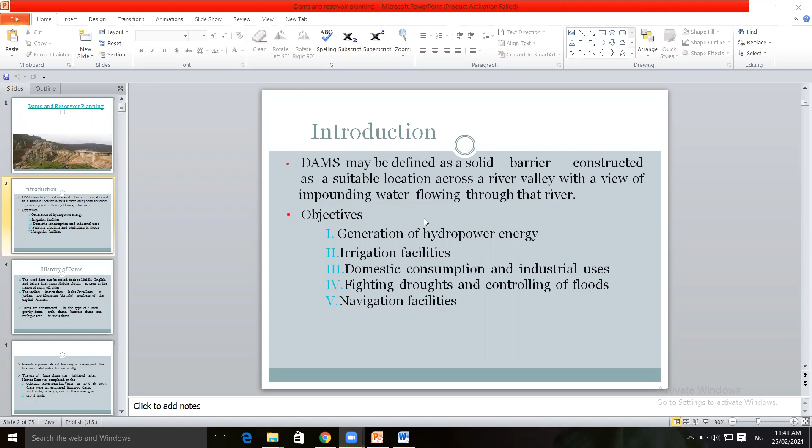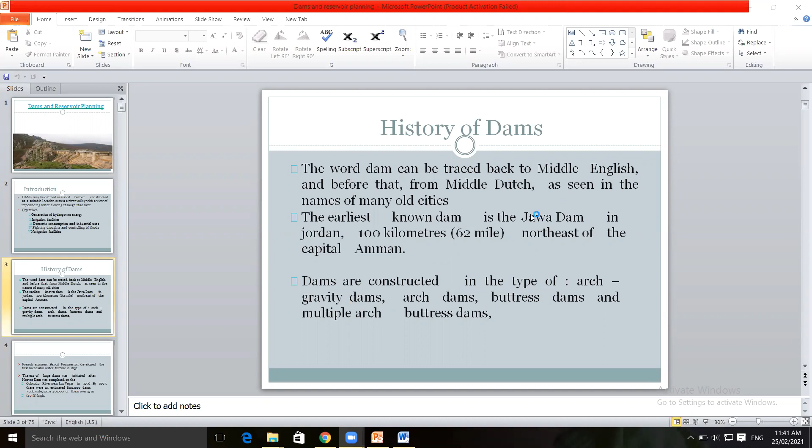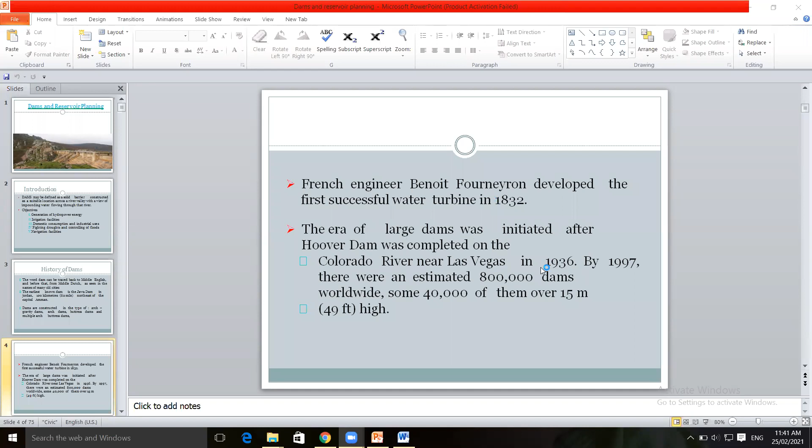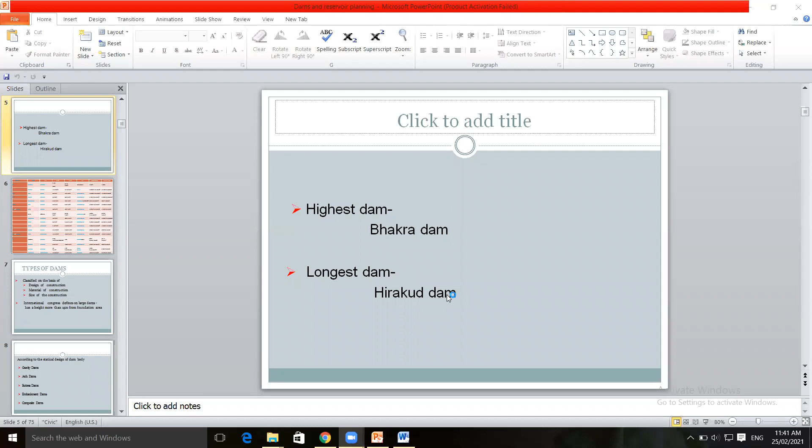The highest dam in India is Bhakra Dam, Bhakra Nangal Dam, and the longest dam is Hirakud Dam. In the table we have seen the longest dam in India and the highest dam in India.

The longest dam is Rihand Dam, constructed across the Rihand River in the state of Uttar Pradesh. It is a concrete gravity dam, having storage capacity of 10.6 cubic km.

Below that, Koyna Dam is there, constructed across the Koyna River, having length 807.2 meters. This is a gravity dam. This Koyna Dam is in Maharashtra state.

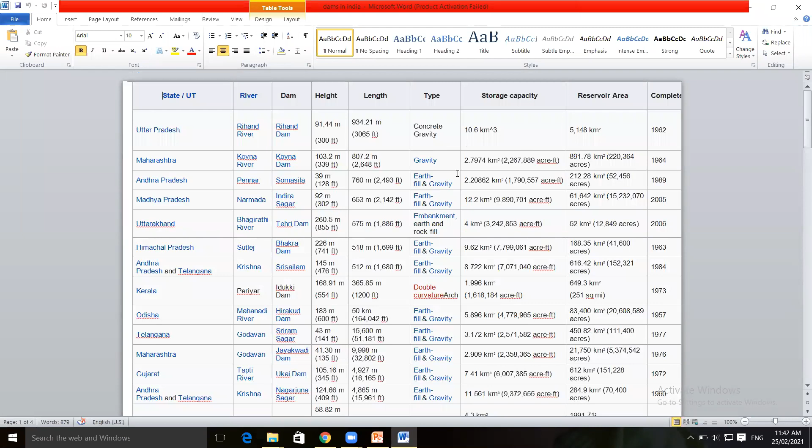So there are different dams according to type and material used, like earthfill and gravity dam, and double curvature arch dam.

So the highest dam is Tehri Dam, having height 260.5 meters, constructed across the Bhagirathi River in Uttarakhand state, having storage capacity 4 cubic km.

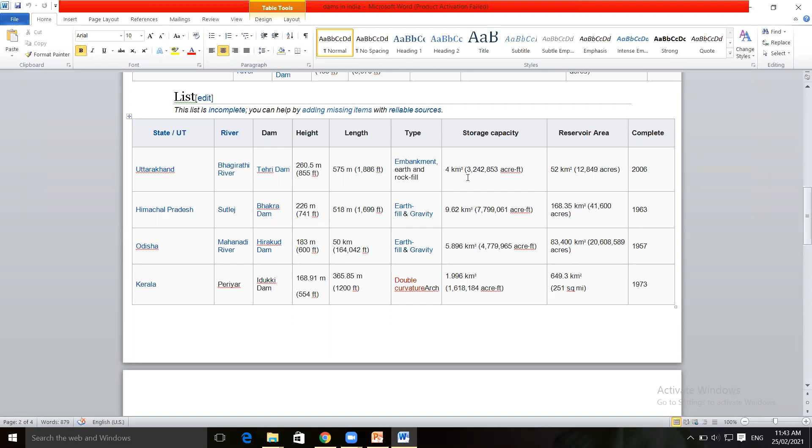So this table shows the different types of dams according to their length, height, storage capacity, reservoir area, and completion year.

Then we have seen the type of dam according to the design of construction. The dams are classified as gravity dam, arch dam, buttress dams, embankment dams, and composite dams.

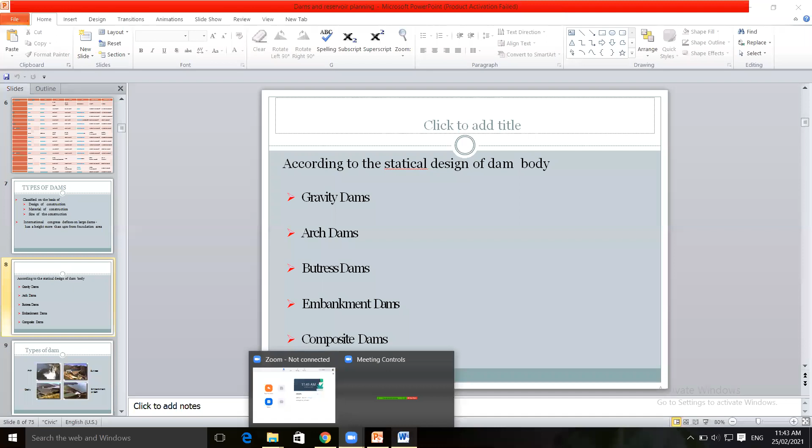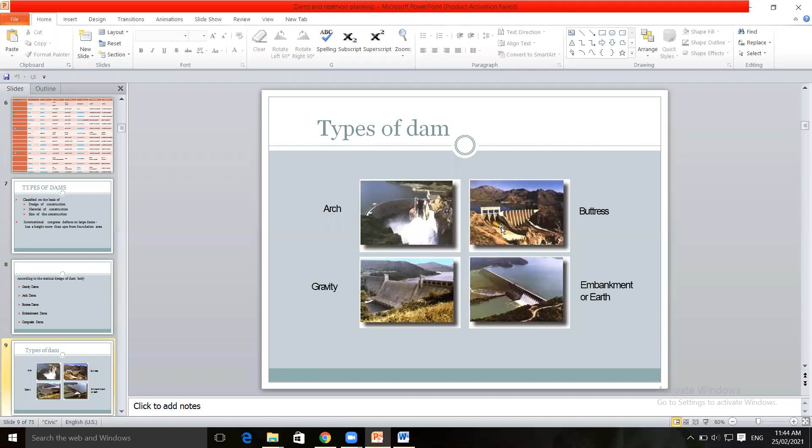These are various images of different types of dams: gravity dam, embankment or earth dam, buttress dam, and arch type dam. These are the various images according to the design of the dam structure.

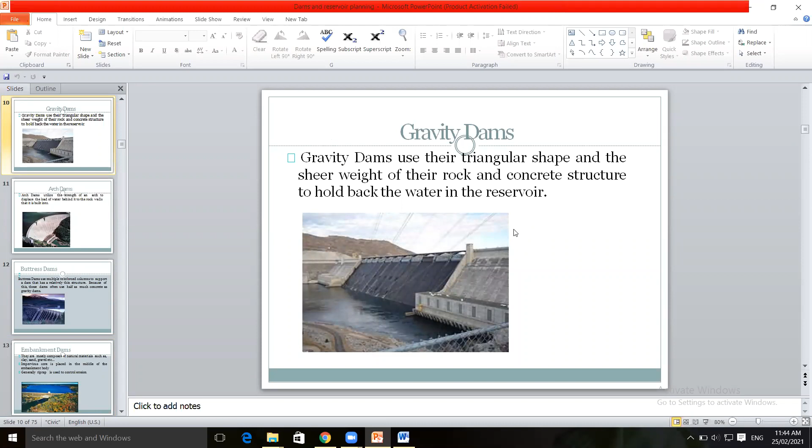This is a gravity dam. It is triangular in shape, and with its own weight it will obstruct the water. Arch dam utilizes the strength of the arch to displace the load of the water on the upstream side. The arch shape is an arch type dam. Therefore, the name given to this dam is arch dam.

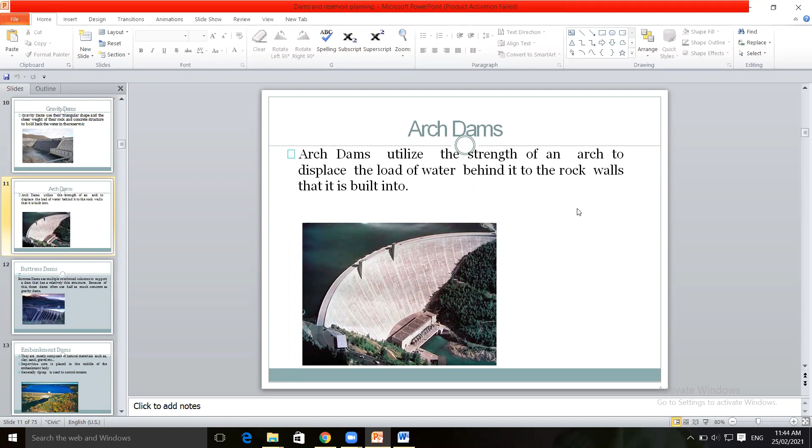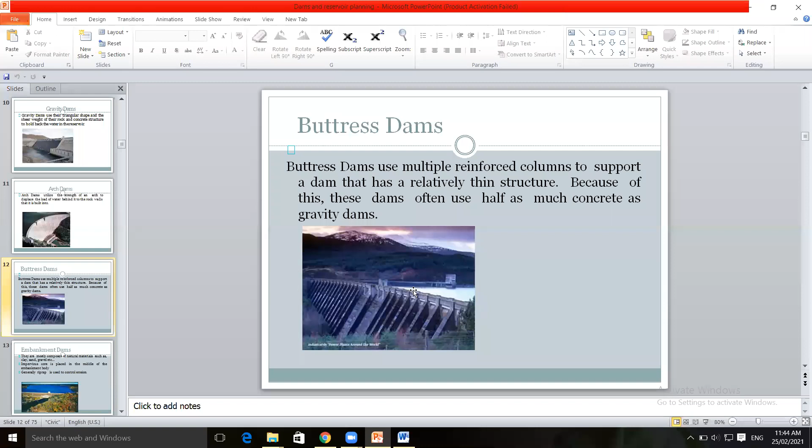Then buttress dam: in this, reinforced columns are supported on the downstream face to maintain the verticality of the dam or to obstruct the water. The buttresses are provided. Therefore, the name given to this dam is buttress dam.

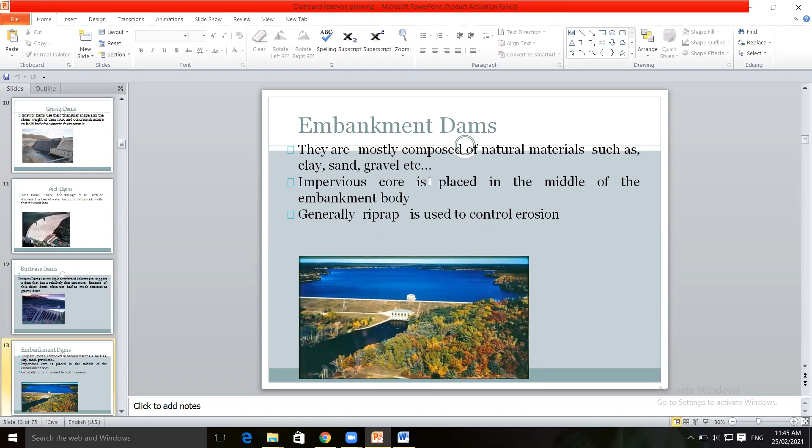An embankment dam is mostly composed of natural materials like clay, sand, gravel, and aggregates. Therefore, the name given to this dam is embankment dam or earthen dam, which is mainly consisted of earth or soil.

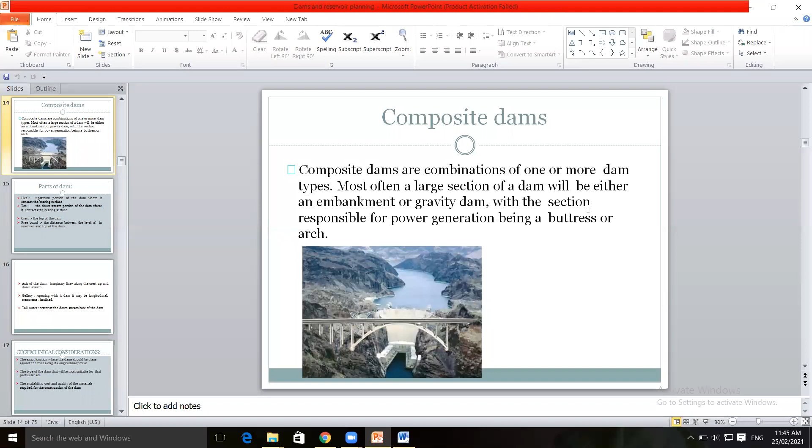And composite dam, in which a combination of dams is used depending upon the objective and function of the dam construction, these composite dams are constructed. There may be a combination of embankment or gravity dam, or a combination of buttress or arch dam.

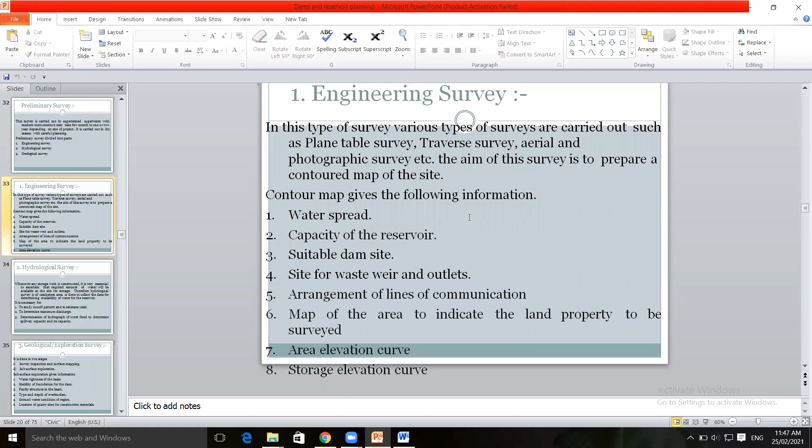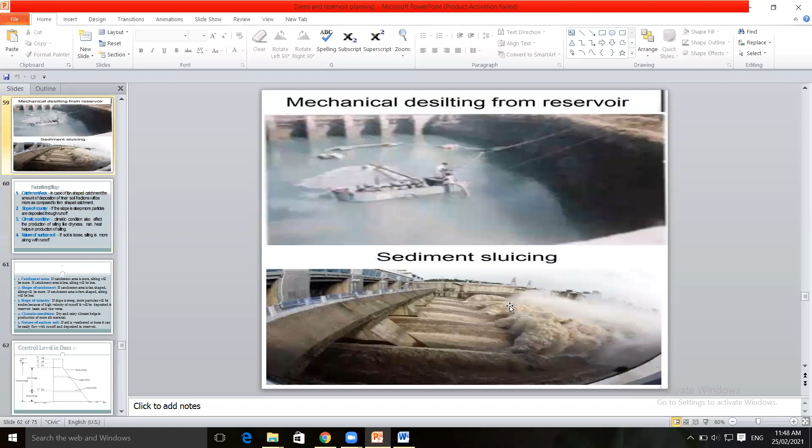Then crest. Crest is the top of the dam. The top of the dam is called top bund level, also called crest level - that is the crest of the dam.

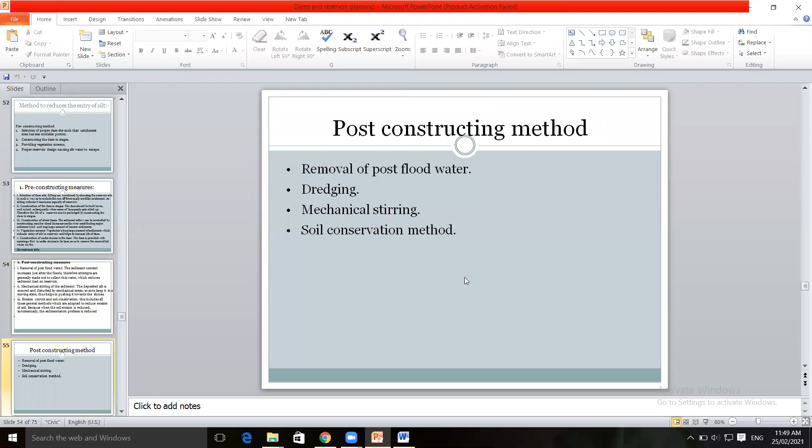Then freeboard - the distance between the top bund level and the highest flood level. The top crest level of the dam up to the highest flood level: the distance between this is freeboard, TBL and HFL, the freeboard.

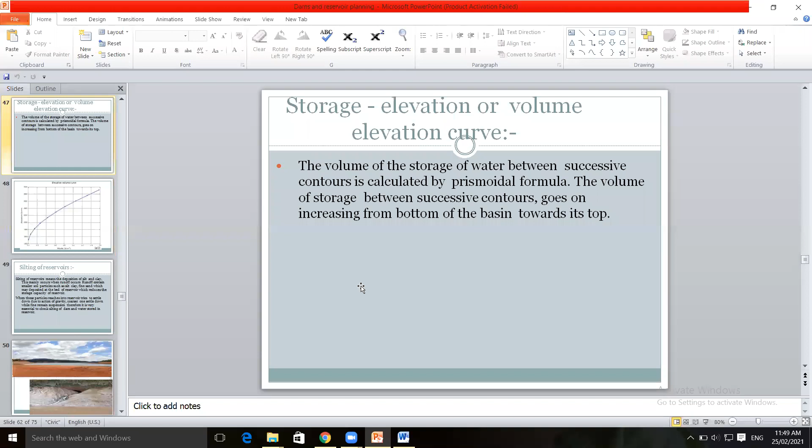Then axis of dam. Axis of dam is the imaginary line along the crest, up and downstream end of the dam, passing through the crest at the upstream and downstream end. That is the axis of the dam, which is along the crest level, along the length of the dam.

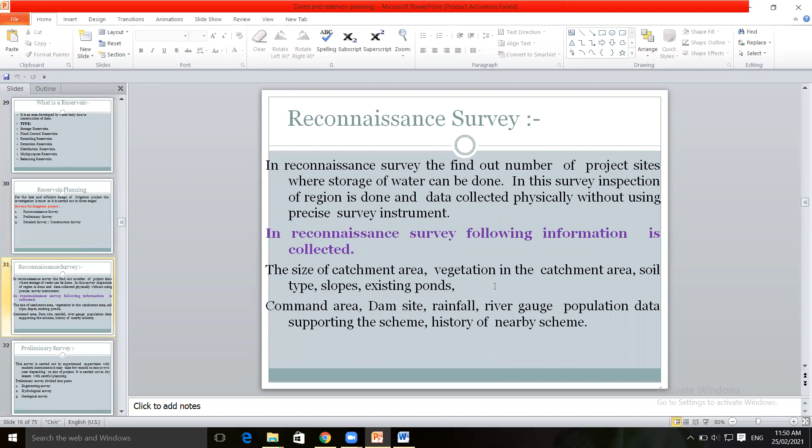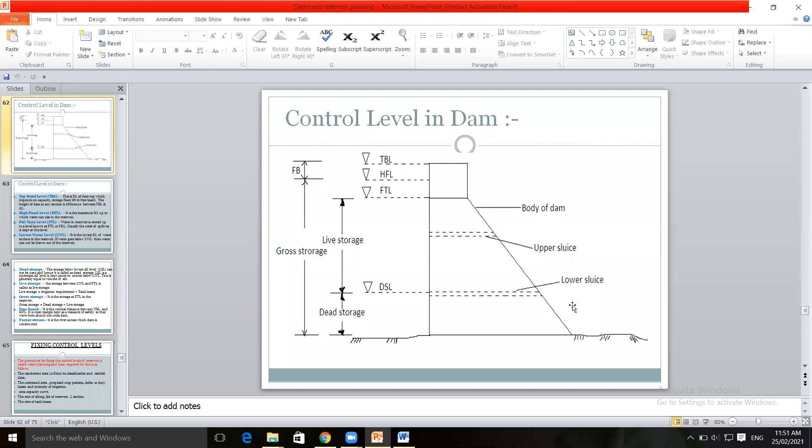Tailwater means the water at the downstream base of the dam, downstream side, downstream area - the water which is stored there is called tailwater. And water which is stored on the upstream side, that is the storage reservoir.

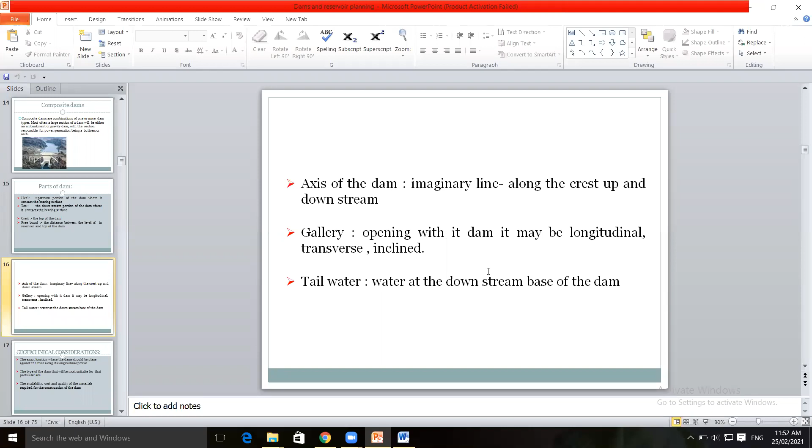So the parts of the dam are: heel, toe, crest, freeboard, axis of the dam, gallery, and tailwater. Heel is on the upstream portion of the dam at the bottom, and toe is on the downstream portion at the bottom, at the downstream end. Crest is at the top of the dam at top bund level. Freeboard is the distance between the top bund level and highest flood level. Axis of the dam is the imagined line along the crest, upstream and downstream. Galleries are the openings provided in the dam, which may be in longitudinal direction, transverse direction, or inclined. Tailwater is the water stored at the downstream base of the dam. These are the parts of the dam.

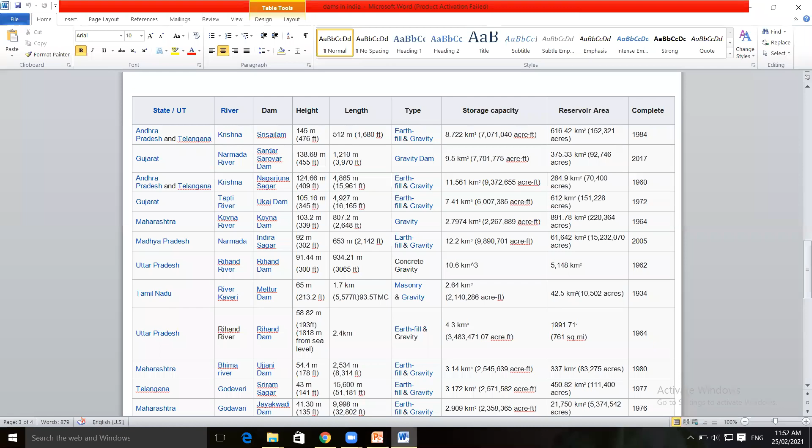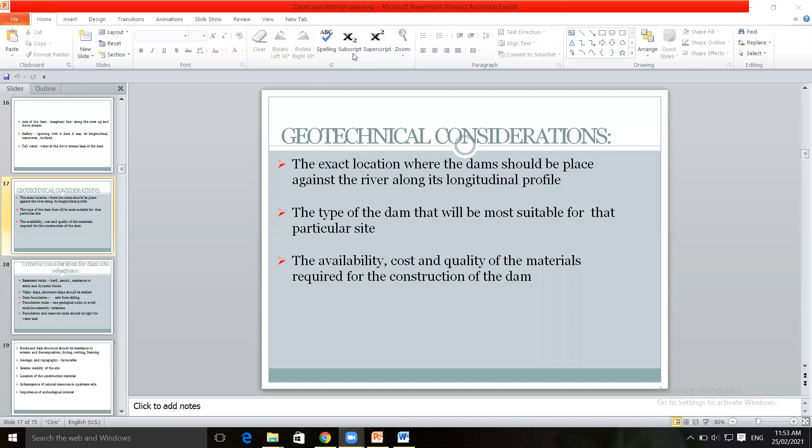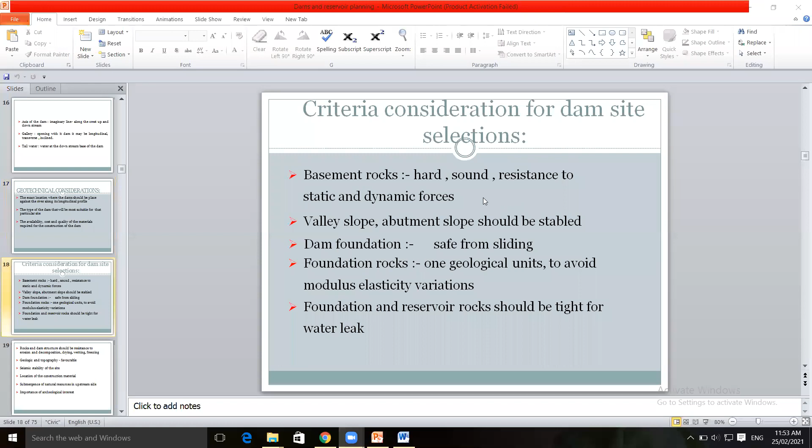In the next section, we'll see the various consideration criteria for selection of the dam, the different factors which are responsible for selection of the dam, that we are going to see.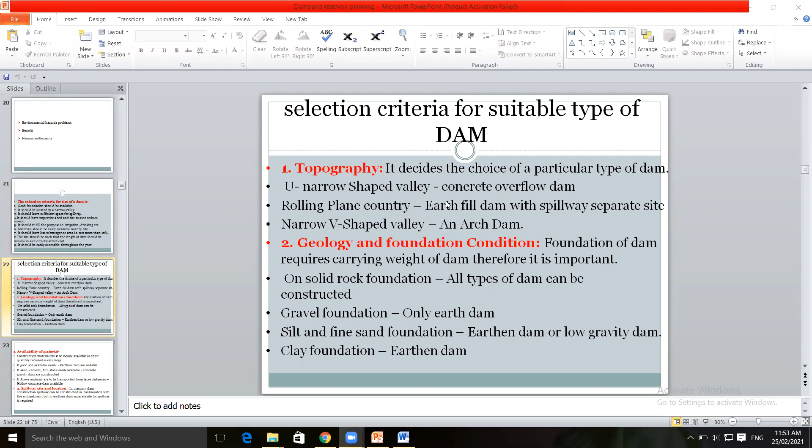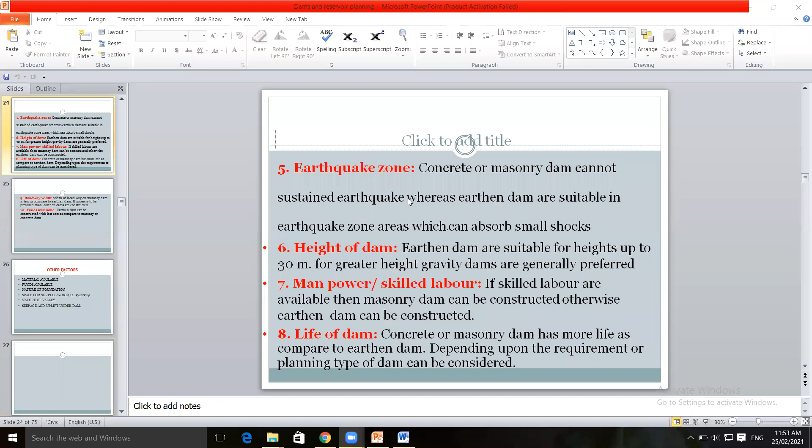The selection criteria for the site of the dam according to its topography, then geology and foundation conditions, then availability of the material used, spillway site and location, earthquake zone, height of the dam, manpower and skilled labor, life of the dam, roadway width, and funds available. This we will see in the next lecture.